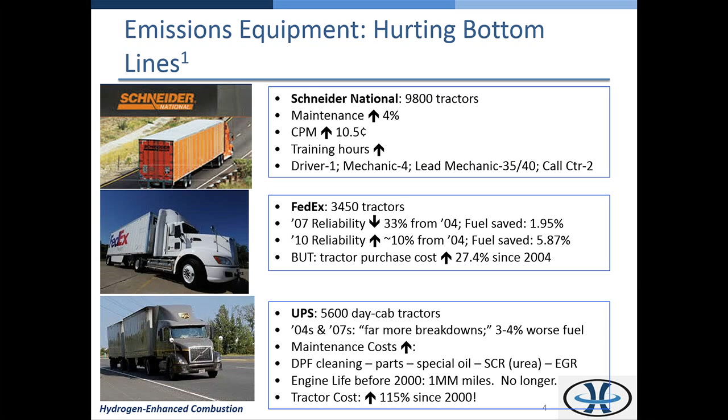UPS corroborates this: far more breakdowns with these new tractors, far higher maintenance costs, no more million-mile tractors. We all want sulfur out of the diesel, but sulfur is a really good lubricant - take it out of the diesel fuel and you have more maintenance issues. UPS reported a more than doubling of the cost of their tractors between 2000 and 2011.

So what we found is market pain increasing for these fleet owners over the years. In 2008, fuel became the number one ops cost. Their fuel is almost 38% of their operations cost, and their cost per mile nearly tripled between 2003 and 2011.

So what are their choices to reduce emissions? Either they have to buy a new tractor, they have to put this equipment on their older tractors, or they can do nothing and get hit with fines.

Now, the new equipment we're talking about is usually in two forms: diesel particulate filters, or DPFs, or selective catalyst reduction units, or SCRs. Each of those comes with its own attendant maintenance costs.

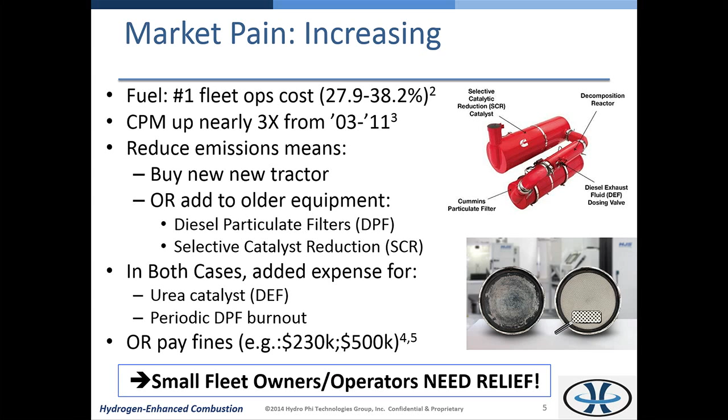Now, at the bottom, you see that there were two firms that failed to comply. The first was a Bakersfield, California shipping company in 2013 that got hit with a $230,000 fine. The second was $500,000 from a waste hauler in California in 2009.

So what we have is a situation where fuel is going up for these people, the reliability is going down, and if the tractors are unreliable, they're sitting in the shop, not producing revenue, and the fleet owner has to rent another tractor. Now they have more equipment to maintain. They're in deep pain, and they need relief.

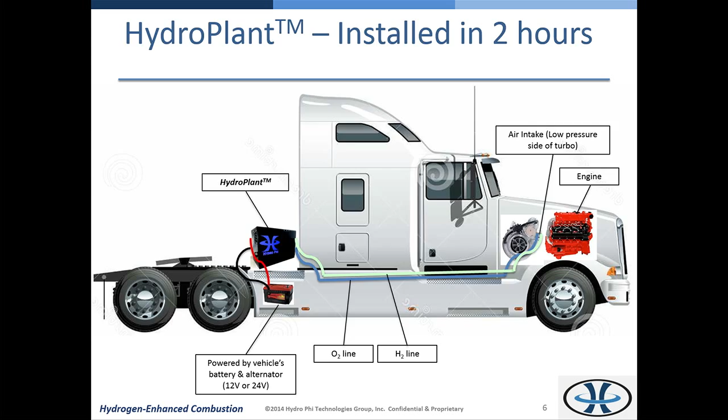We provide that relief. We have a system that installs in 2 hours on a vehicle. It connects to the vehicle's battery and alternator system, and then we run 2 hoses up to the air intake. These 2 hoses contain pure hydrogen and oxygen. We make this hydrogen in real time, on demand, through PEM electrolysis, which I'll explain in a minute.

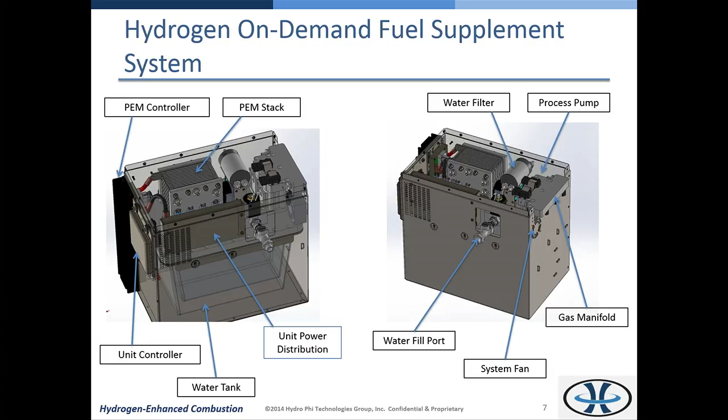The PEM generator creates pure hydrogen, and that goes up to the low pressure side of the turbo before going into the engine. So we introduce it on the air side, not the fuel side. Below, you can see we have a tank that holds distilled water, and that distilled water lasts for somewhere between 1,000 and 1,500 miles. So the refill is less frequent than even diesel refueling.

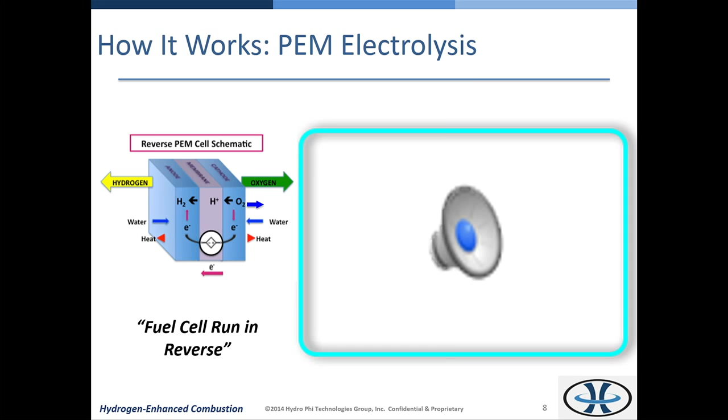So what is PEM electrolysis? PEM stands for proton exchange membrane, or sometimes polymer electrolyte membrane. They're interchangeable, and it's really a fuel cell run in reverse. A fuel cell combines two reactant gases, hydrogen and oxygen, maybe methane and oxygen, and the reactant product is water and electricity. Here we're taking electricity and splitting the water into its constituent hydrogen and oxygen. The difference between this and your garden variety high school electrolysis experiment is that we don't need to add an acid or a base to the water to make it conductive. It's just pure distilled water.

Let's take a look at how it works. You're looking at the inner box that contains HydroPhi's HydroPlant hydrogen on-demand system. This box sits inside a sturdy steel box that can be mounted external to a vehicle. This is the sanitary fill port where pure distilled water is added. It's extremely important that only pure distilled water is added, as this will affect the life of the PEM stack. On the side you can see two separate gas hoses, hydrogen and oxygen. These are normally sleeved in stainless steel braided cables for running up to the engine compartment for injection into the air intake. You can also see the hoses for the heat exchanger, used to maintain a consistent water temperature.

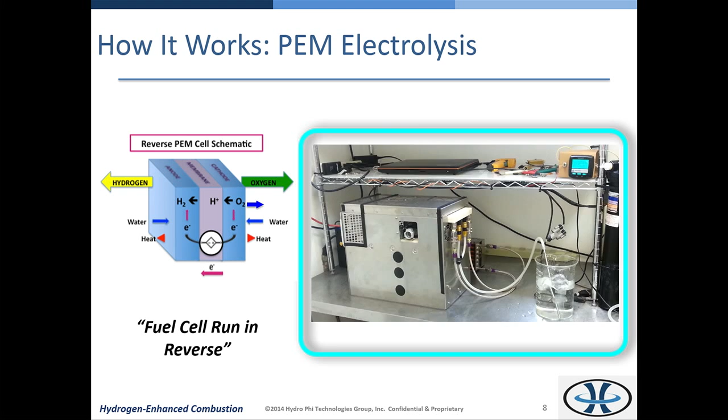HydroPhi's HydroPlant system is extremely easy to use. The in-cabin dash-mounted display enables the user to remotely start the system. After running through a 30-second system self-check, power is supplied to the PEM electrolyzer, and hydrogen production begins. From room temperature, full rated flow can typically be achieved in as soon as 5 minutes. The display will show the driver when water is low or out, and will also notify if there are temperature, pressure, or current exceedances.

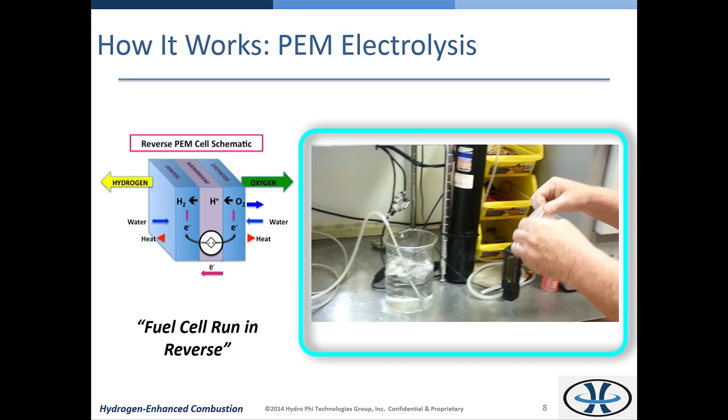What we're going to do now is show you the power of pure hydrogen and oxygen. This sandwich bag is being filled with the equivalent of one single drop of water. When split from a liquid to a gas, water undergoes a volume increase of about 2,000 times. When this gas is inducted into the air intake of the engine on the low pressure side of the turbocharger, it enriches the fuel and allows it to burn more completely and more cleanly, providing better fuel economy and reduced emissions. Now pardon us as we cover our ears.

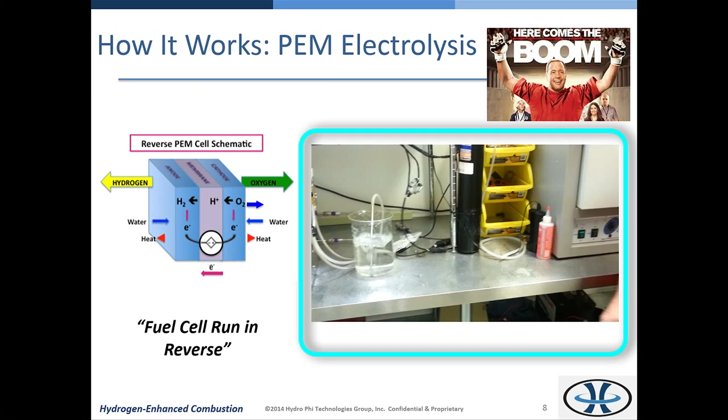I'll be glad to do that in the next room upon request, if anybody wants to see it again.

So what you just saw was the inner box that contains the PEM unit. That inner box is placed within this outer box, this sturdy box, and that gets bolted to the back of the truck or inside the bus.

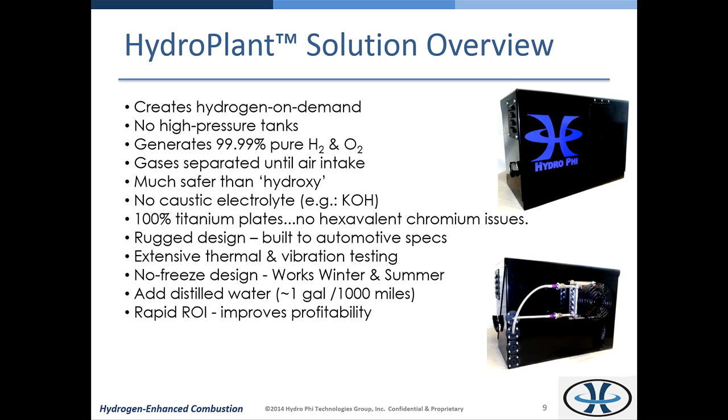I want to summarize the differences between this approach and the chemical electrolyzer approach, which is more ubiquitously found. First, we're creating pure hydrogen and oxygen. They're creating a mixed gas called hydroxy, which is inherently more dangerous. We don't use a caustic electrolyte like potassium hydroxide—they do. We just use pure distilled water. Our conductive plates are made out of titanium; typically they use 316L stainless steel, which is surgical grade stainless steel. That's very corrosion resistant, but if you stick those plates in 130 Fahrenheit, pH 13 water, it will leach iron and chromium over time. And if you remember the movie Erin Brockovich, hexavalent chromium in water is a big EPA no-no.

So what are the advantages of our system? We've seen fuel savings anywhere between 12 to nearly 25%, depending on the size of the vehicle, the age of the vehicle, and the driving profile. We've seen dramatic reductions in greenhouse gases. Drivers report an increase in horsepower and torque, and a reduction in maintenance costs—the oil stays cleaner longer. There's about a 50% reduction in the consumption of AdBlue, and fewer DPF burnouts over the life cycle of the tractor. We designed this to be a flexible and extensible architecture so that we could grow the system into different applications over time.

The most important difference is that we took a determined approach to differentiate ourselves from others in the market by making this ruggedized enough to rattle around on the back of a truck, which we did not find anywhere else in the market.

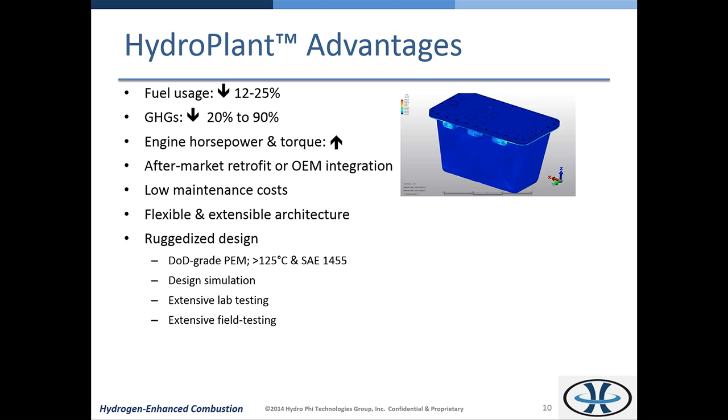The PEM is built to DoD specifications. We used design simulation to ensure that components were robust, rugged, and reliable. The electronics are all automotive grade, so they're good to 125 centigrade.

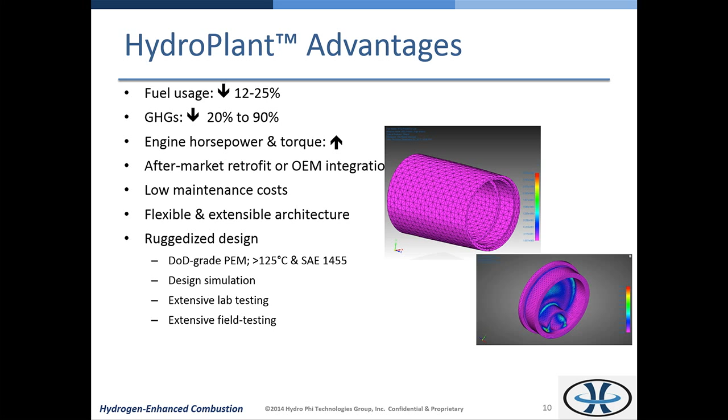We did extensive lab testing. We ran the system in an oven at 127 Fahrenheit to know that this thing could be strapped to the back of a truck in the middle of Iraq in the middle of summer and not skip a beat. And finally, we did vibration testing on a shake table to ensure all the components would survive.

So we feel like we have the most rugged system on the road today, and these systems have been running in Mexico City for very nearly 11 months now with no failures.

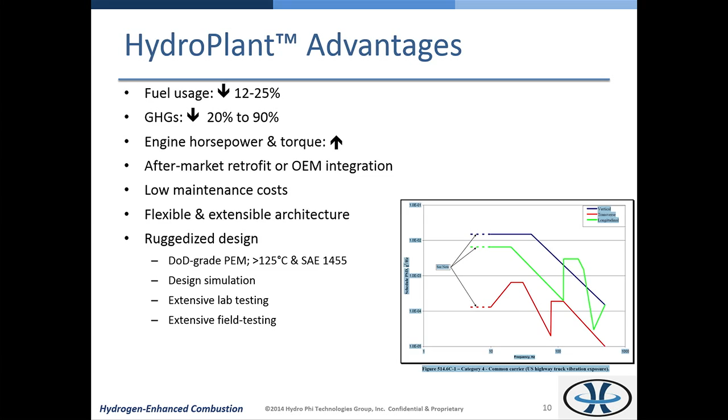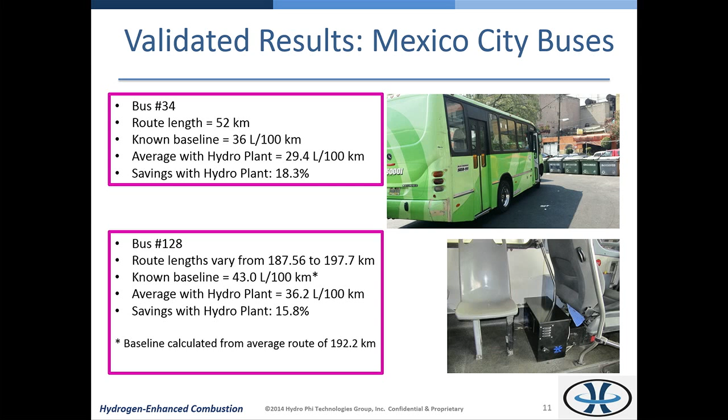The fuel results from Mexico are actually very impressive. You see here just over 18% and very nearly 16% for a couple of city buses. The drivers actually buy the fuel themselves, and they know to the peso what they spend every day on fuel. And because these routes are the same every day and well known, we have high confidence in these results, and we've measured very low dispersion in the data delivered to us.

Similarly, we've done emissions testing. First, we did testing on our own in-house 5-gas analyzer on a genset, and you can see between the left and rightmost of the strip charts there, that's the delta in greenhouse gas emissions represented in the box below, between the genset being turned on at no load and then 20 minutes in at 50% load, where the thing is now hot and off-gassing like crazy from the engine and exhaust manifold, and pulling more fuel because it's under load. That's a very impressive result.

What it turns out for Mexico City is what they care about is PM, or particulate matter, specifically PM10, which is a measurement of the mass of 10 micron or smaller particles in an exhaust stream per unit time and distance. As you can see, we've got a very nearly 60% reduction in the PM10 count. That's important because it's now taking these buses from exceeding the PM limit in place since this September, last month, and bringing it under that limit.

This now enables the possibility for these bus drivers to not have to buy new equipment, but to keep their old equipment. And that is about to be blessed by the Mexico City government.

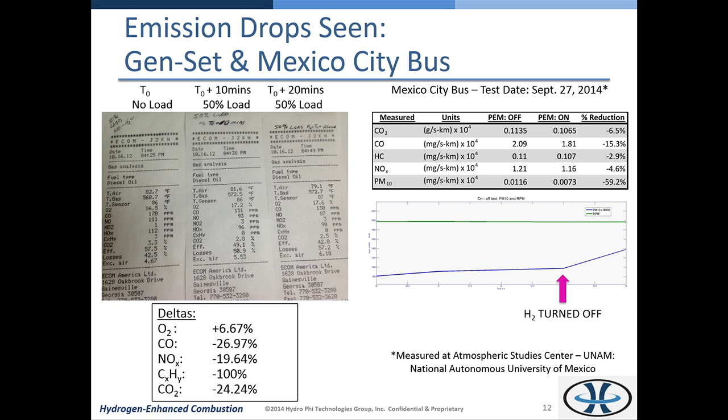Below is an indication of how rapidly the system responds to the electrolyzer being on and off. The green line shows a constant 1,975 RPM as measured on the dynamometer. You can see the instant the PEM stack is turned off, the PM count starts to rise. Those tick marks are half-second intervals, so it's a fraction of a second, and you immediately see the impact.

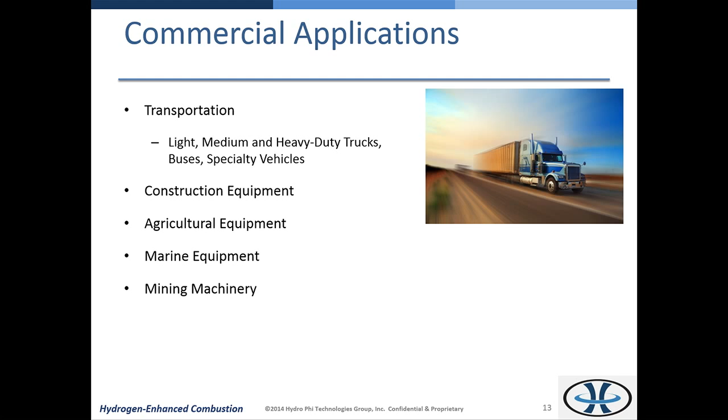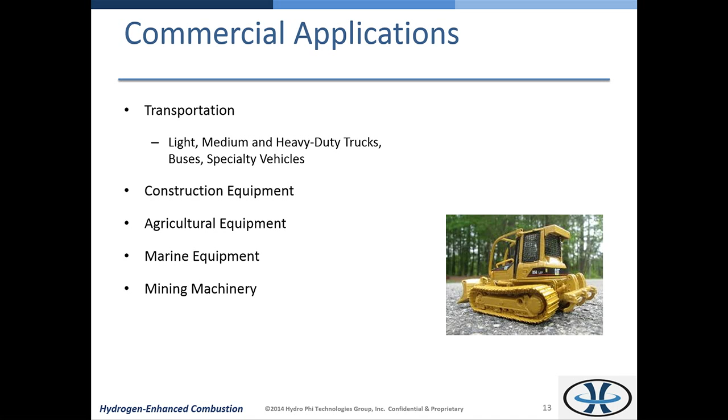A wide variety of commercial applications in small, medium, heavy-duty vehicles, small buses, and small specialty vehicles such as waste haulers. We can also address construction and agriculture equipment. Eventually, the largest would be marine applications where you'd have tugs, barges, workboats, fishing vessels, and then some of the equipment that Caterpillar showed. Eventually, we can do very large quarry and mining equipment.

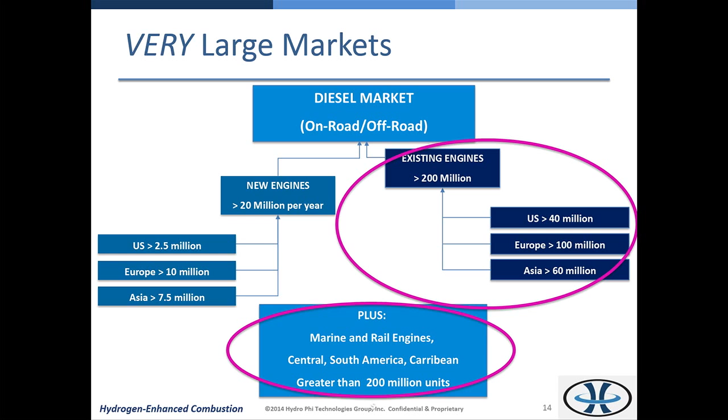The size of these markets is just staggering. So we're going to focus on older engines, no new engines, just the older engines. These are so-called single pulse injection, the old style injection systems, because that's where we work best. Out of this 400 million engines, there are still tens of millions that are the older style injection systems that would fall in our sweet spot. We could never catch them all. It's a very, very large market.

If you do the math to look at the value to the fleet owner, the ROI, I've shown here the European and US case on the left at 3 different fuel efficiency levels: 12, 16, and 20%. Your ROI is going to be a function of your price of fuel, how many miles you drive per year, your baseline fuel efficiency, and what percent fuel savings you can achieve. You can see that for the US case, that ROI is somewhere between 13 and 21 months.

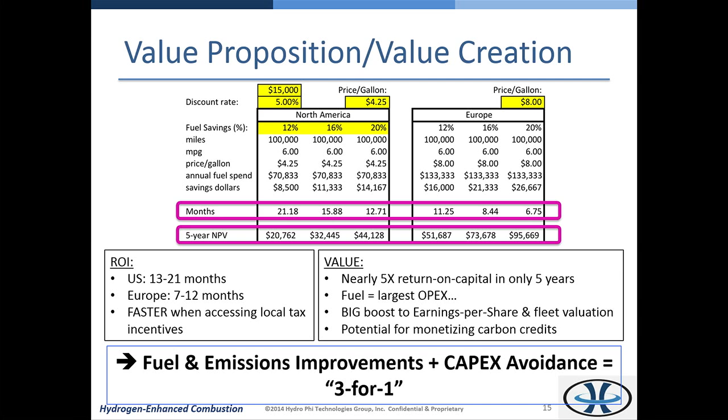And in the European case, where fuel is more expensive, 7 to 12 months. And that's not accounting for the possibility of accessing any federal or state incentives for this kind of equipment, nor the possibility of monetizing carbon credits, each of which could further shrink those ROI timeframes. For the CFO, he would care about his return on assets, and we show in this middle case, the 16% case, a 5 times return on asset.

I just want to touch on our go-to-market strategy. As I mentioned, we'll start on small buses and trucks and small trash trucks. We've got a program in Mexico City talking about 100 to 1,000 buses to start and many thousands more. Monterrey and Guadalajara are next. We have a subsidiary set up now in Poland, and we're about to start an install next week on 2 buses in Poland. As we grow the system, we'd move to larger over-the-road vehicles, and eventually to larger systems like mining and quarry equipment, and the very largest systems, marine systems.

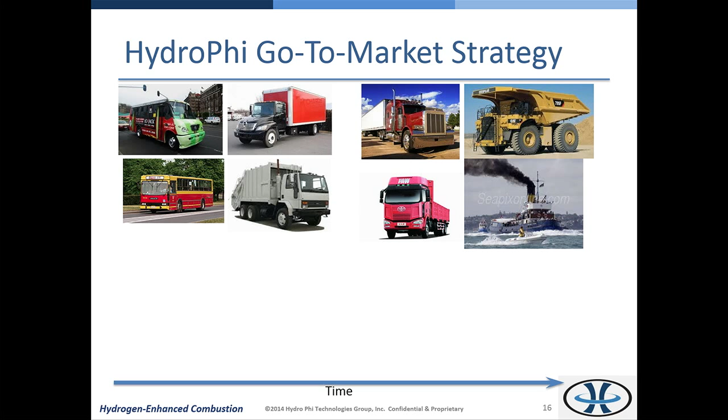This is a progressive geographic rollout we have planned, where we start in Mexico, Central and South America, and Eastern Europe, then eventually go to Western Europe and North America. Over time, we would try to do business in the places where it's more difficult, which would be China, India, and Africa.

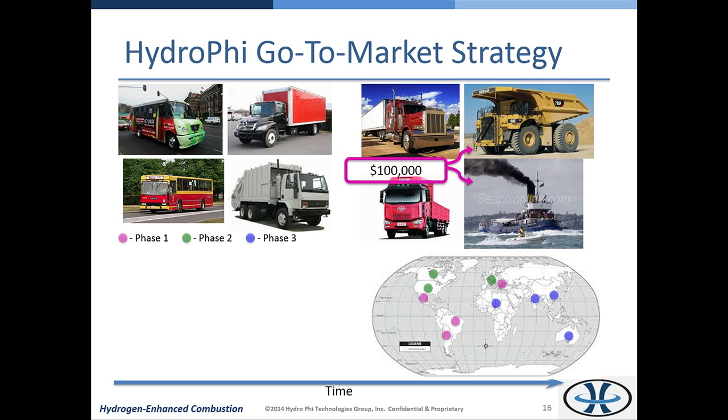And then parenthetically, we see value in the $100,000 in helping us scale dramatically to these largest systems, where we're going from producing 4 to 5 liters per minute of dry hydrogen to needing dozens and dozens for these very largest systems. We're talking about much bigger electrolyzers, much higher amp draw, and that's the development we would foresee with that prize.

And then finally, the team: Roger Slotkin, 40 years of starting businesses and turning them around, and experience in offshore manufacturing. Mark Robinson, one of our directors, has been a consultant to over 300 renewable companies. Reed Meyer, our COO, comes from the oil and gas industry, specifically the fugitive emissions business with gasket and valve experience. And then myself, a recidivist entrepreneur—this is my 11th startup, with several of them out of Georgia Tech.

And so I thank you for your attention, and I'll be happy to answer any questions.